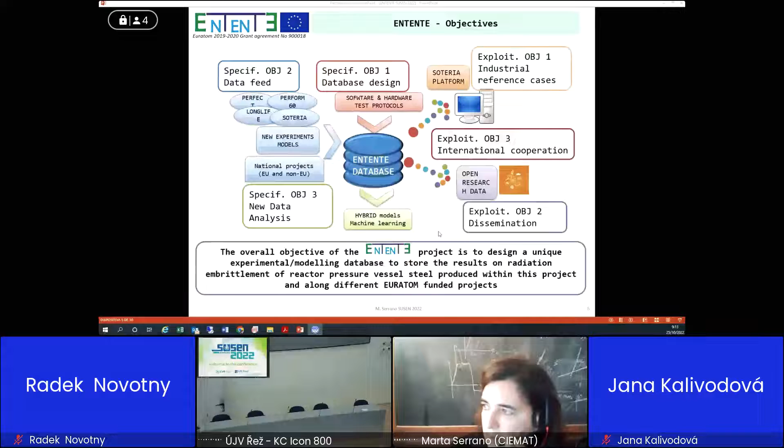The consortium is quite large - 27 partners from industry, research centers, and small and medium enterprises across 12 countries, including Ukraine and Japan. The grant is 4 million euros, as usual. You can see all the partners here, and the budget distribution is more or less similar for everybody, except 2 or 3 large partners, but overall it's fairly equally distributed.

Now I'll talk about the challenge in creating a database. When we started writing the proposal, we had to learn new concepts that, for us as scientists - I am a mechanical property scientist - are totally far away from our usual business. The key challenge is to define the database architecture. For that, we need to talk about ontologies of data. We need to decide if we want a relational database, or interfaces with other databases, and all this work is done not by material experts but by informatics experts in the consortium.

So we have a partner who is devoted to the design of the database with all these new concepts that are far away from the material business, but they are working on the database, and we will show you some examples. When you talk about data, data are important, but the most important are the metadata.

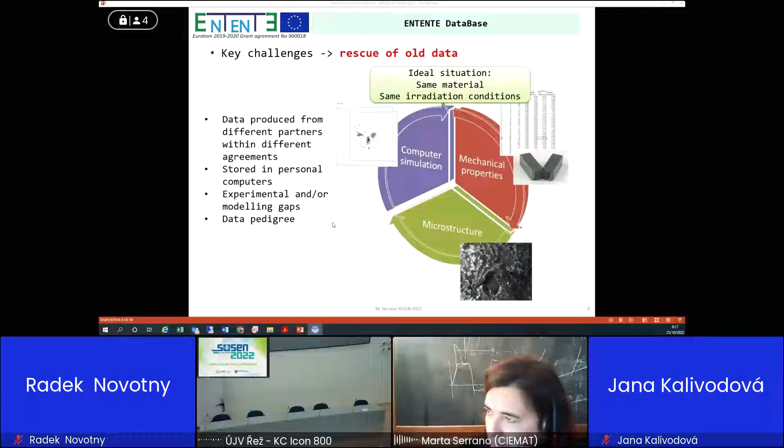Other key challenge on the definition of the database is the definition of the data formats. For mechanical properties, it's quite easy because they are determined following a standard, and in the standard the format of the report is more or less defined. When we are talking about microstructure and moreover on modeling, we have no data format defined. How do we store pictures, how do we store the results of a Monte Carlo model? So we need to define data formats for these activities.

We also want to have interoperability with other material databases, because other material databases exist. For example, the European Material Modeling Council has a database, the European Material Characterization Council, IAEA has a model database on Cascade, NEA, and so on. So we want to define the database with interoperability with other material databases.

In that issue, we have involved NEA people also in the consortium. They are totally informed about the database effort. So in principle, during these 10 years after the project finalization, we can reach an agreement with NEA to export the database from CIEMAT to the NEA, and there it will remain for a longer time.

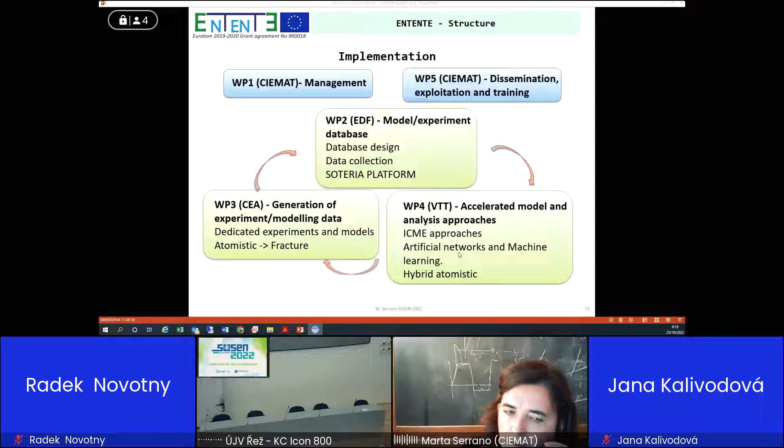I will go very quickly here. For work package 2, we are in the infancy of the definition of the database. We know that in 4 years it will be very difficult to have the full database defined. But at least we have done the first step on the data formats. We will set up data format committees. We follow the structure of existing databases such as RPV Steel, Plotter, and REAP. And we want to integrate the database with the Soteria platform.

For the data format, we have established data committees of experts that are defining the data format for different techniques.

The first one that has already a data format and structure is the Mechanical Property Committee, as expected, since we have the standardization of the mechanical properties. But I want to say that these two committees are working very well too, the Transmission Electron Microscopy and the SEM committee, collecting data and defining data format.

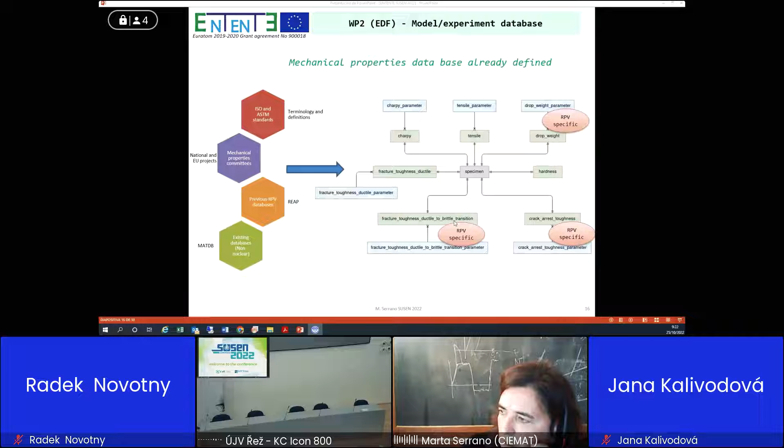I want to show you the mechanical properties database that is already defined. We use existing data, MATDB, REAP, national European projects, and ISO and ASTM terminology and definitions to define the mechanical properties database. Some of the mechanical properties are RPV specific, such as the drop weight, the T0 determination, and crack arrest toughness. So we use most of the data that already exists, but we include RPV specific mechanical properties.

About the Soteria platform, this is only to show you that the Soteria platform is a multi-scale modeling platform, and we want to improve the Soteria platform here with different models and so on.

I want to show you some of the new analysis techniques from data mining and artificial intelligence algorithms that we are using within Entente. First of all, VTT is defining the workflow for the use of microstructural data and also tensile test data, in order to integrate this knowledge into an integrated computational material engineering, the ICME approach. That is the one where you don't need to have all the information at all scales. You can go from one scale to another, for example, from atomistic model to microstructure by semi-empirical models. Not all has to be atomistic based or physical based.

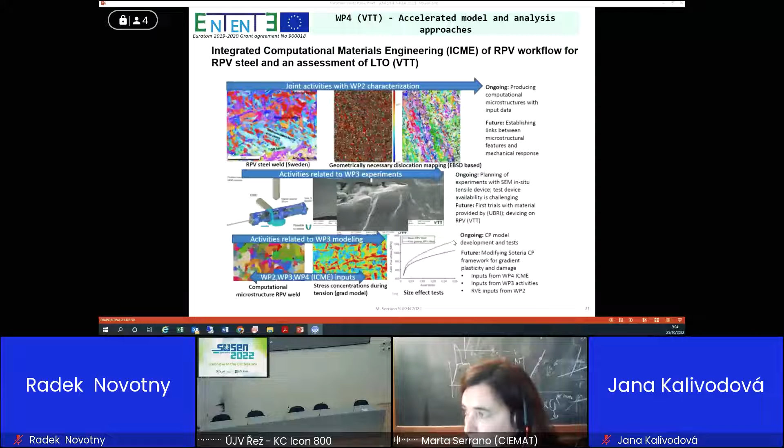I want to show you a very nice example of the exploitation of data with artificial intelligence algorithms. This is work performed by Nicolas Castin et al. They demonstrate that a hybrid model, combining a kinetic Monte Carlo model, which is a pure atomistic model, coupled with artificial intelligence algorithms, can predict with high accuracy the embrittlement of the reactor pressure vessel, only knowing the chemical composition of the material and the irradiation condition. This is already published, and we used 100 atom probe tomography measurements and more than 1,000 experimental data points. This is very, very innovative.

We also have another very good result using a new analysis technique. This is a publication from Diego Ferreño et al. We used the existing database of RPV embrittlement, the RPV capsule from the Plotter database. The Plotter database is the database that supports the ASTM standard on the evaluation of the surveillance program. This Plotter database includes more or less 2,000 data points of Charpy shifts.

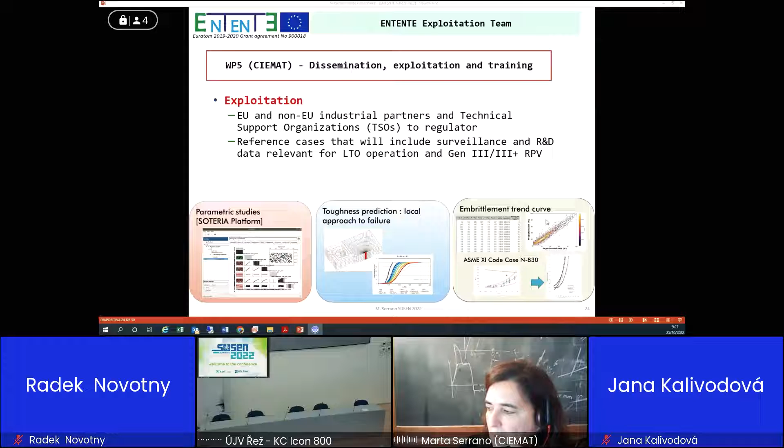If we go up in the scale, we also want to exploit the toughness prediction by local approach to fracture. And if we go to a high level of use, we want to exploit the ENTENTE database to improve the embrittlement trend curve and also to support ASME code cases. But also we have identified strong links with other Horizon 2020 Euratom projects that deal with RPV embrittlement. Of course, we have the STRUMAT project and the FRACTESUS project.

We can use STRUMAT data. STRUMAT deals with the variation of nickel, manganese, silicon on the transition temperature shift. We can use this part of the exploitation, I mean the SOTERIA platform, to analyze the microstructural evolution. FRACTESUS deals with the determination of fracture toughness of irradiated material, but it can also be supported by fracture models. And if we go up to an engineering level, the embrittlement trend curve, we have identified several international collaborations, but also FRACTESUS and STRUMAT, where they are producing fracture toughness data, can also be stored in the ENTENTE database.

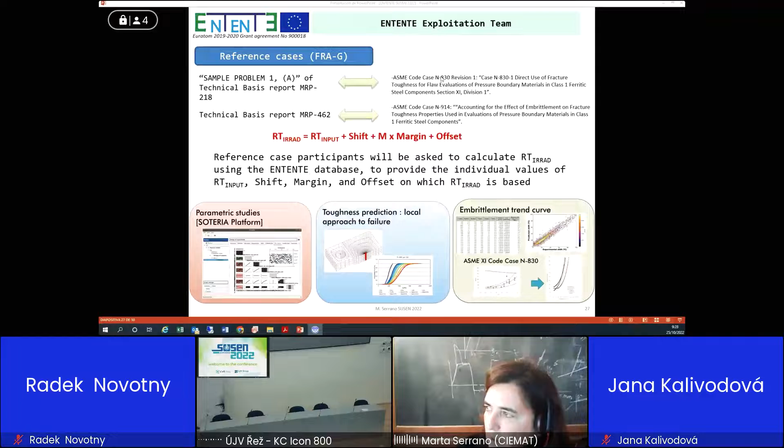We have already defined reference cases to exploit the data. The first one has been defined by Framatome Germany, and it is a sample problem to support the technical basis of the new ASME code case on the use of the master curve. I am not going to enter into detail, but the reference case participants will be asked to calculate the shift using the ENTENTE database to provide individual values of this input. And this will be used to support two ASME code cases on the use of the master curve.

We have defined another reference case. It has been defined by Mark Kirk. The problem here is NuScale, a small modular reactor. The problem of the NuScale vessel is that the material has higher manganese, higher nickel, and low irradiation temperature. You can see here in this plot the irradiation condition for NuScale. The temperature is extremely low, lower than existing RPV steels in operation, but also the nickel content and the manganese content are extremely high.

We are going to set up a reference case. It has been already set up with this chemical composition and this irradiation condition, and we try to use this hybrid model with kinetic Monte Carlo and artificial intelligence to estimate the transition temperature shift. And with this, I reach the end of the presentation.

ENTENTE started in September 2020. We are now reaching month 24. The specification of the ENTENTE database is available. The database will be populated along the project execution. Next year, we plan to start to populate the database with the data that has been collected. The first experimental results are available, and the first analyses with machine learning are available. And with this, I end the presentation.

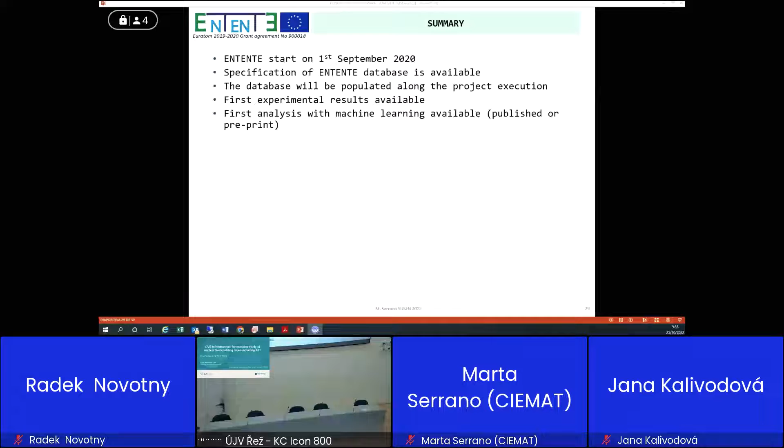I'm Petra Gavelová from Research Centre Řež, from the Material Analysis Department, and I will introduce our CVR infrastructure for complex study of nuclear fuel claddings, including accident-tolerant fuel claddings. I will introduce zirconium-based cladding topics at the beginning. Then I will tell you some of our CVR activities in nuclear fuel cladding, including ATFs. Then I will introduce the nuclear fuel inspection activities in CVR, led by my colleague Marcin Kopec. Then I will switch to the mechanical testing of neutron-irradiated cladding tubes in shielded hot cells, led by my colleague Alica Federikova.

And the last of my points will be the part of microstructural analysis, which is focused on electron microscopy studies, mostly on scanning and transmission electron microscopy, which is led by my colleague Patricia Holodová. So, what are the zirconium-based cladding tubes?

Let's say that this is ultra-pure zirconium with alloying elements of niobium, tin, iron, and chromium, and they have very good properties for cladding tube applications, mostly because of their neutron transparency and good corrosion resistance to withstand the extreme conditions of the primary reactor circuit. The zirconium-based claddings have a very high durability and strength. So the combination of these properties gives them importance as nuclear cladding tubes.

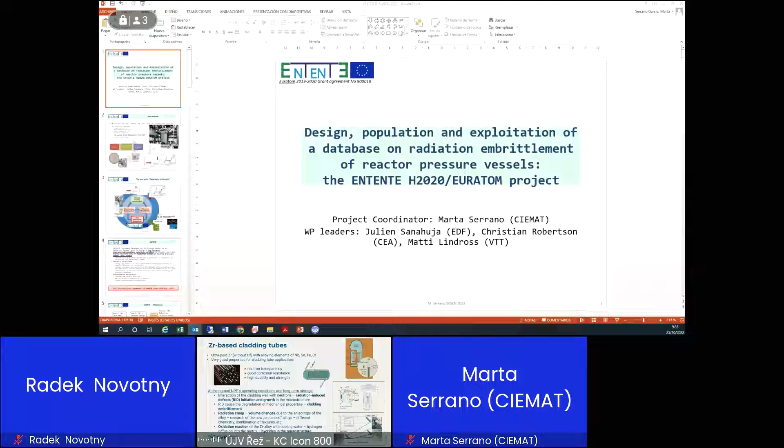What happens under normal nuclear power plant operating conditions and long-term storage? During the process, there is the interaction of the claddings with the neutrons. So radiation-induced defects are created in the microstructure, and they cause the degradation of mechanical properties. That means the material is hardened and embrittled. We can observe the radiation creep.

It means the volume changes due to the anisotropy of zirconium alloys. And we can observe as well the oxidation reactions of the zirconium with cooling water, and we can observe the hydrogen diffusion into the matrix by analysis of hydrides in the microstructures.

Briefly about the accident-tolerant cladding concept, whose study sped up after Fukushima in 2011. The ATF cladding concept means the improvement or replacement of currently used zirconium-based cladding. So we can speak about ATF cladding materials or ATF fuels. ATF cladding materials try to modify the current cladding materials, so by coated zirconium alloys or improved zirconium alloys.

And from advanced materials, we have some advanced steels, refractory metals and silicon carbide ceramics. From the perspective materials, we can mention the chromium-coated zirconium alloys, which are tested in nuclear power plants from 2019. As well, a very perspective material is so-called FeCrAl, so an iron, chromium, and aluminum-based metal, and widely tested are silicon carbide materials among the ATF cladding materials. From the ATF fuels, there is the way to improve uranium oxide material, to develop high density fuel and encapsulated fuel.

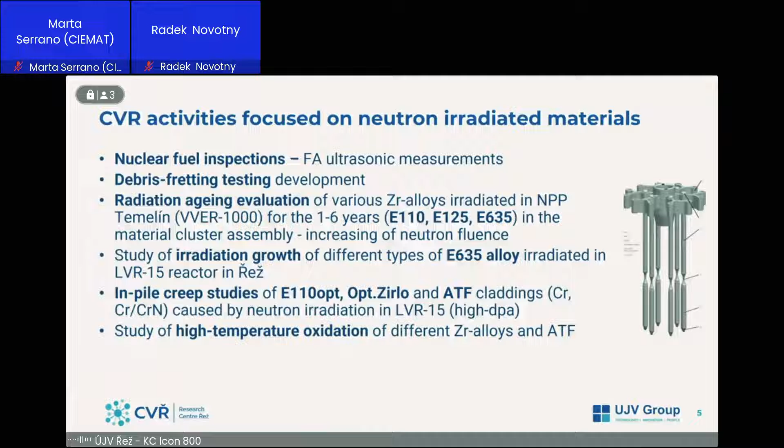And we study the in-pile creep of E110, Optimized ZIRLO, and as well ATF claddings, which are based on chromium and chromium nitride coating. These materials are as well irradiated in LVR-15. And a huge area of the study of zirconium alloys is high temperature oxidation of different zirconium alloys and ATFs, in cooperation with the UJP Institute in Prague.

So going to the nuclear fuel inspections, which support the Czech nuclear power plants, we provide NDT methods. CVR developed the ultrasonic system for fuel assembly geometric measurements. This system automatically detects the spacer grids on the fuel assembly and conducts the measurements in this area. Here is an example of the output of the ultrasonic system applied to real fuel, which is a single side measurement, and there the system automatically detects the spacer grids, which are marked by a DM.

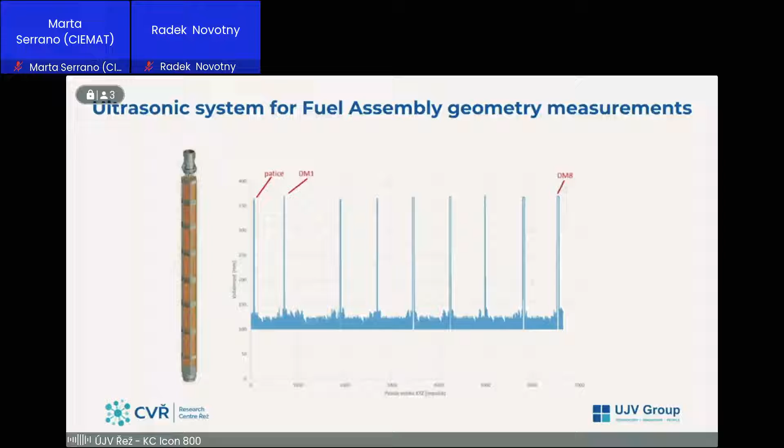CVR also developed automatic digital image processing for fuel inspection optimization, enhancing the speed and accuracy. It eliminates the human factor, and digital image processing helps also with on-cladding changes like oxides, hydrides or pitting, which we can notice on the fuel rods.

Going to the very perspective method of debris fretting testing, which is performed in our fuel group. Debris fretting testing we can perform in air conditions at room temperature, in wet conditions, in defined chemistry, as well as at elevated temperatures, and we can simulate in the autoclave real conditions: PWR, BWR, and VVER conditions.

So here are some results from the debris fretting testing where we compared two types of ATF claddings, and there is visible the fretting depth of different coatings, also supported by the microstructure, where we can compare the results on the surface damage.

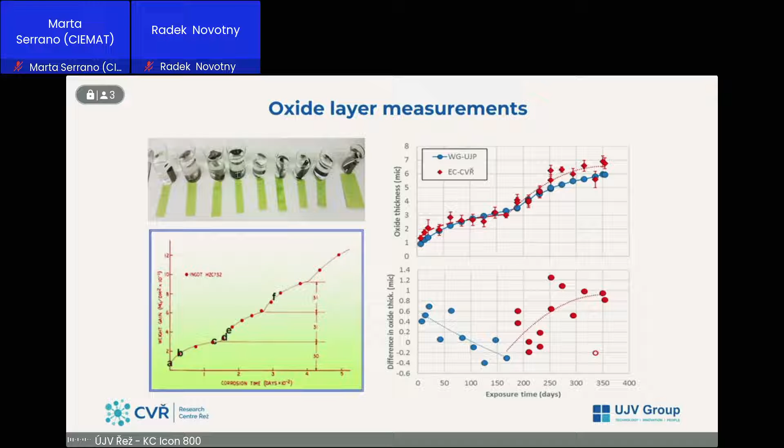Our fuel group also does oxide layer measurement by electric current. So the electric current oxide layer measurements in wet conditions we can see compared to the standard weight gain methods, and there is perfectly visible the type of the oxide increase with almost no water intake.

And as well we do neutron radiography. This is as well the NDT technique to have insight into the internals of the specimen. So mainly that was developed for hydrogen aggregation assessment with the precision on the level from 12 to 16 ppm.

Going to our second group in our department, which is the mechanical testing group of neutron irradiated cladding tubes in hot cells. So we do the standard mechanical testing as well. We develop new methodologies mainly for evaluation of ATF claddings. So we do tensile, compression, bending testing, high temperature creep, low or high cycle fatigue.

As well we do micro and nano indentation and adhesion testing of claddings and ATFs. And we have in hot cells the autoclave for stress corrosion cracking initiation in simulated PWR conditions. So here is the insight to the hot cells, and there are examples of specimens after tensile testing in axial and transverse direction, which we perform on cladding tubes.

So just briefly what we do, this is the project of testing of irradiated E110, which was irradiated from 1 to 6 years in Temelín. And then we do the mechanical testing like tensile and creep testing supported by electron microscopy to evaluate the radiation-induced damage. I will tell later.

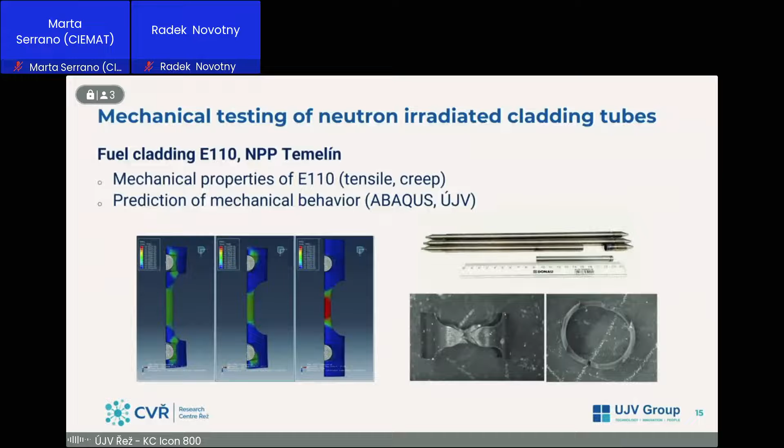And we cooperate within the UJV group, where we compare the experimental data with the simulations. So they predict the mechanical behavior, and we cooperate with our experimental data. Regarding the testing of ATF claddings, we developed within a few projects the new methodology. So we do on ATFs the low cycle fatigue.

We characterize the ATF coatings by nano hardness and SEM with wavelength dispersive spectroscopy. So we notice the chemical changes and local mechanical changes in the ATF coatings after neutron irradiation. And as well, we study some unfavorable effects in fuel claddings and their impact on fuel safety. So here are several new methods we developed under the TAČR project.

And going to the microstructural support, which is focused on electron microscopy studies, this is like the last part of evaluation. So we compare the reference and neutron irradiated microstructure and evaluate the radiation-induced defects and structural phases, and as well the radiation growth, and it correlates with the results from

the mechanical testing. We as well compare the non-deformed and deformed specimens so that we notice the areas of localized deformation, and these areas are the source of information. There we study the deformation mechanisms. We evaluate the general and local microstructure by electron microscopy methods. Here's the example of tensile testing in axial and transverse direction from the cladding tube.

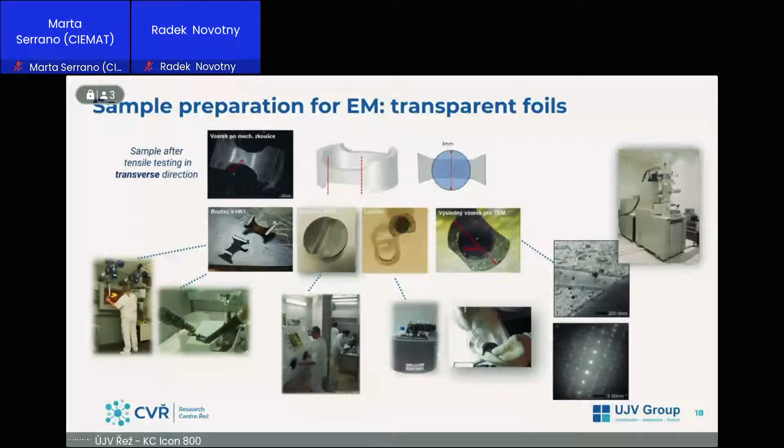So here's the workflow, how to prepare the specimen from the transverse direction after mechanical testing. So we choose the place and do the cutting, grinding and polishing to obtain the final thin foil to observe the radiation-induced damage in the transmission electron microscope. These irradiated materials are prepared in hot cells and glove boxes.

What we do by electron microscopy, we do image and diffraction analysis and chemical analysis, and then the results from transmission electron microscopy are completed by scanning electron microscopy, where we perform the crystallographic analysis and grain size, texture, and we observe the local misorientation after irradiation, and as well the chemical analysis we do in low magnification to complete the TEM results.

And here are some examples of reference materials, zirconium-based claddings. There are the Russian E110, E635, and E125 microstructures, and as well there are the Zircaloy, ZIRLO, and Optimized ZIRLO different microstructures.

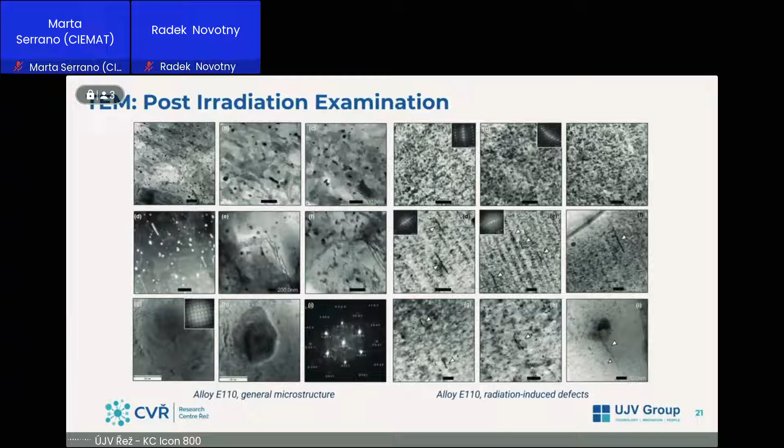Regarding post-irradiation examination, what we evaluate in neutron irradiated materials, we observe the radiation-induced precipitates and different dislocation loops of A and C types. We can observe the hydrides in the microstructure, and we observe the amorphization of previous secondary phase precipitates, which are visible after high neutron fluence. And as well, from the deformed specimens, we describe the deformation mechanisms, which is widely studied.

So here are some examples of A dislocation loops in microstructures which are formed at low fluences. This is the first image. The second image, there we can observe the C type dislocation loops which are formed as fluence rises. And then we can observe at high magnifications the irradiation-induced precipitates associated with these loops.

And as I told about the radiation growth of the fuel rods, these C type loops are responsible for radiation growth. So that's the way we evaluate after different neutron fluences compared to the mechanical properties and the radiation growth evaluation.

And these are the images of the place which is marked on the specimen. So this is the specimen taken from the deformed place directly, and we can observe the deformation bands within the grains in the prismatic planes of the hexagonal lattice of zirconium alloys.

So here we can study in detail, and there is the way that loops might get annihilated or dragged by dislocations, and they produce a clear zone free of these defects. So these free channels serve as a path for dislocation gliding. So this is the strain localization at the grain scale.

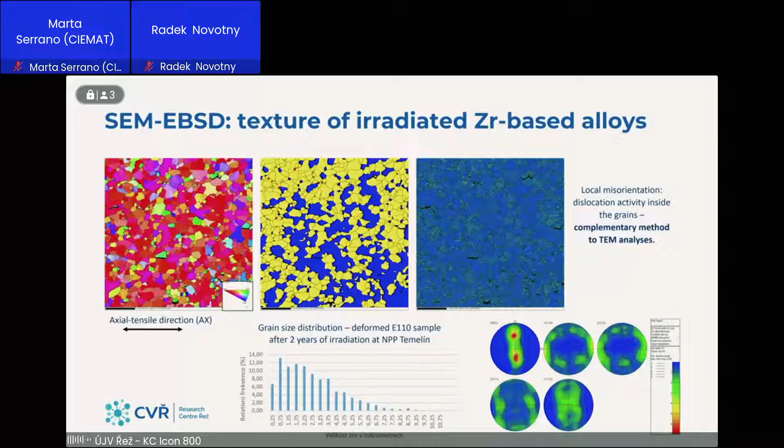So to give a brief summary of our research on zirconium claddings, we do non-destructive testing as well as destructive testing, and we evaluate the influence of neutron and gamma radiation, corrosion environment, heat treatment and deformation hardening, and we do the mechanical testing and we observe the change in mechanical properties.

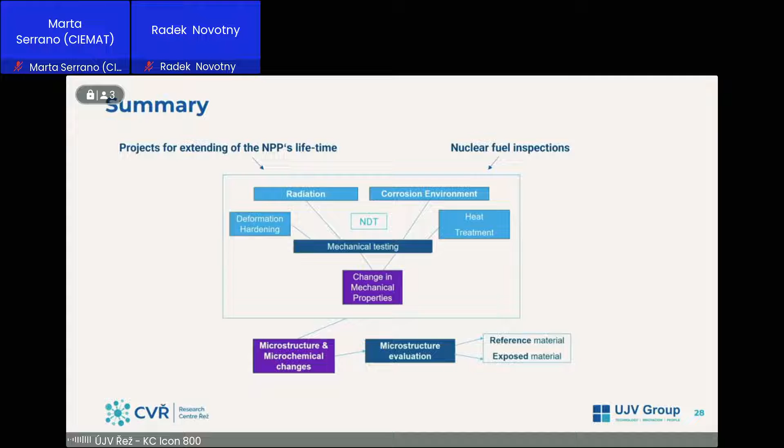Thank you very much, Petra, for your detailed presentation about the inspection of the fuel and testing of the cladding materials, which is actually the first barrier for the fuel going out of the reactor. So it's very important to have such developed methods, and I'm really very proud of your team and all the researchers here in CVR that they are able to perform such analysis and be a very good player in this area.

So, is there any question? Yeah. Thank you, Petra, for a very nice presentation. I have just a simple question. What's the lifetime of fuel cladding? How long can it be used?

There is the 40 years, and it should be like the lifetime of fuel claddings. Fuel claddings, yeah. I mean, how long can they be used? You said that you irradiate the samples from 1 up to 6 years. And I know that the campaign takes like 18 months usually. So I don't know how long it can be used.

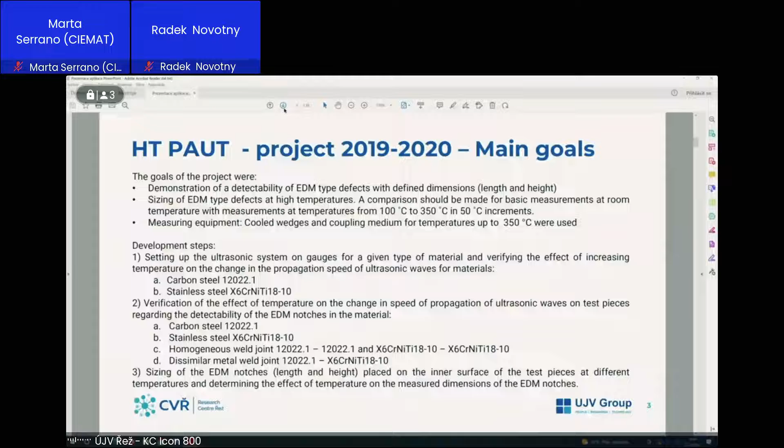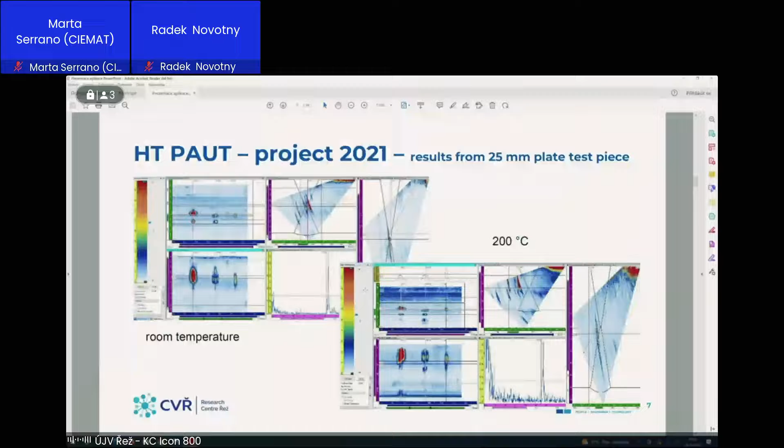Here are similar results which you could see: for temperatures up to 350, detectability and sizing was okay, and nowadays we have two qualified inspection procedures, and we are in the state of preparation, demonstration of measurement in situ. So it means in the technology of the secondary side of Temelín NPP.

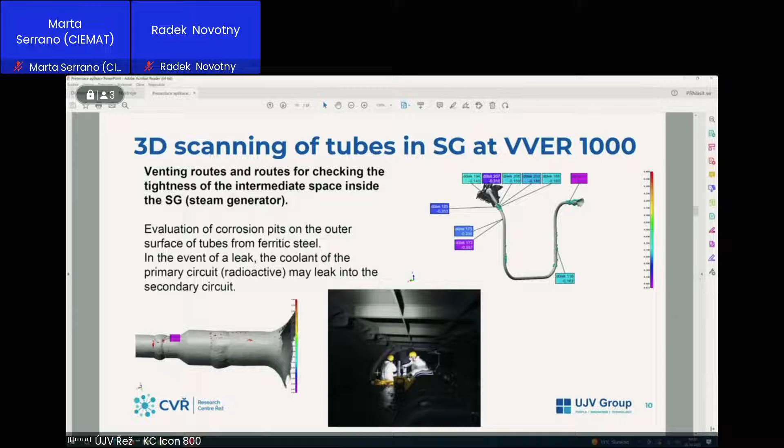This example is again from Temelín. We measure carbon tubes 16 times 4 millimeters inside steam generator. The reason is it can occur corrosion pits on these tubes, and in the event of a leak, coolant of the primary circuit may leak into the secondary circuit. That's why we are measuring again in this not friendly conditions, radiation, and in this case also temperature from 40 to 50 degrees centigrade.

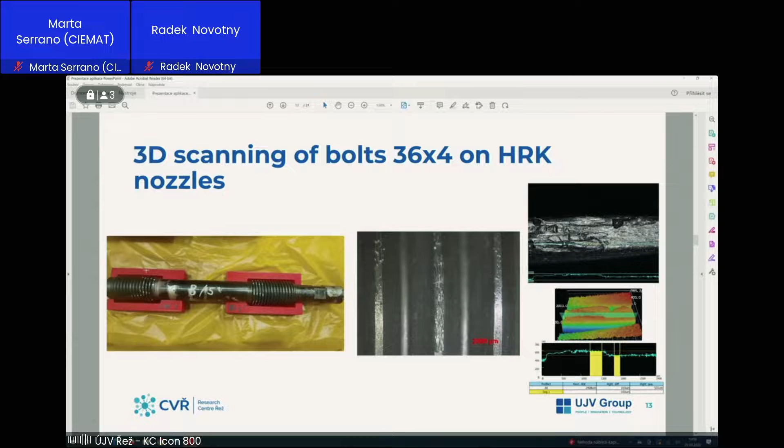Here is an example when we were using replicas for more than 30 years operation. Operator has to open these flanges, and we are asked to perform 3D scanning. We made the decision that the best way would be to take replicas and then scan these replicas. Here you can see our results. On the left photo you can see our special tool to take replicas. And now let me speak about manipulators.

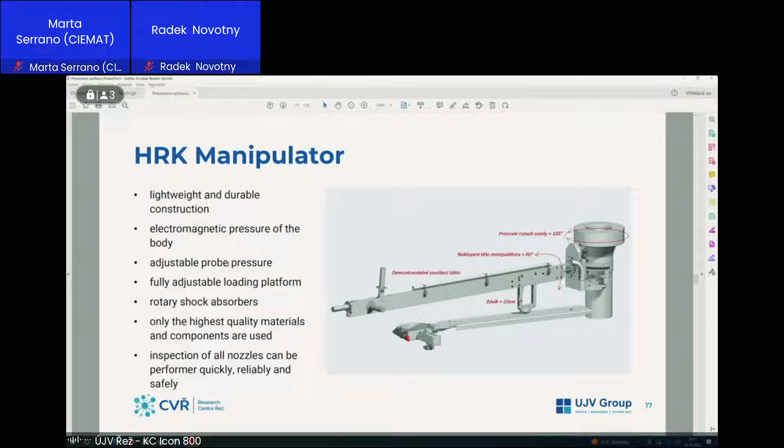Here is a manipulator for control rod nozzle weld joints of the reactor cover of the Dukovany NPP. Here you can see the main features of this manipulator. This manipulator is lightweight and has durable construction. There is electromagnetic pressure of the body, adjustable probe pressure, and so on. Nowadays, ČEZ will start inspections with usage of this manipulator.

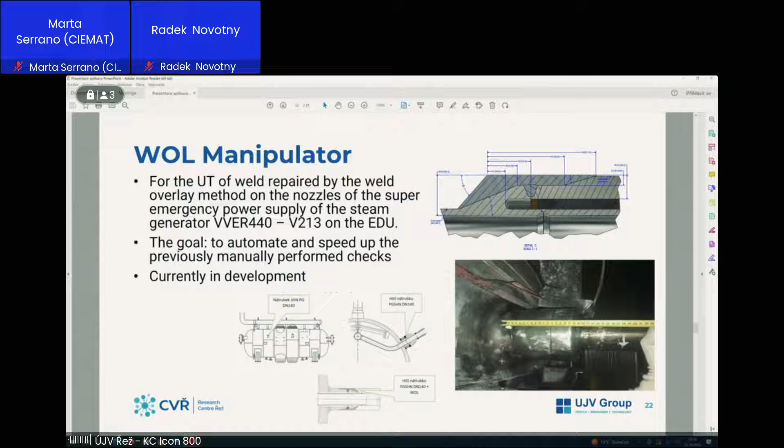Now let me speak about the weld overlay manipulator. I showed you that we scanned this nozzle before the weld overlay was applied. Weld overlay is applied, or will be applied, on all super emergency nozzles. During the operation, ČEZ has to perform inspections, and we were asked to develop a special manipulator. This manipulator you can see on this figure. There are dimensional limitations which we have to solve, and there is self-supporting fixing on the pipe. Here are another drawings of this manipulator.

In the last part of my presentation, I will speak about new methods. Let me start with the so-called NEWS method, non-linear elastic wave spectroscopy. There are two techniques, and in this case, for pipelines, we use non-linear wave modulation spectroscopy. The principle is that we send two frequencies using two sensors and one receiver, and we check if there are some frequencies and multiples of these F1 and F2 frequencies in the spectra. If there are many of these frequencies there, then we can say that there is some nonlinearity caused by a crack.

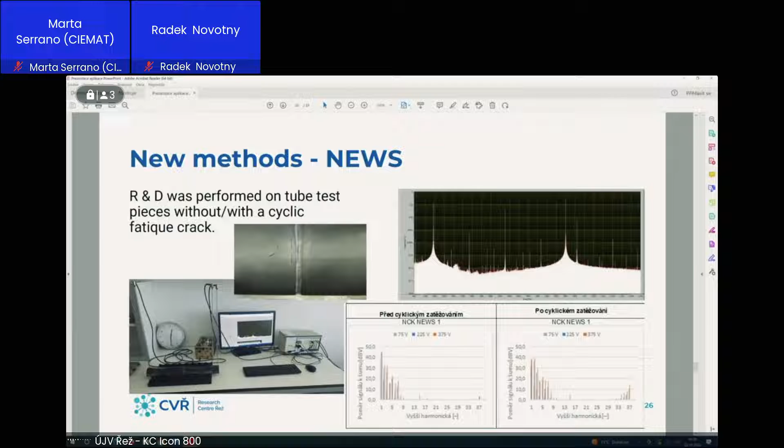And why are we doing it? At Temelin nuclear power plant, they have leak monitoring of the pipe system using more than 100 ultrasonic sensors. Our research and development was on the same sensors used in this system, two senders and one receiver. We also performed evaluation if sensors and pipelines can be used for this method, and last year and this year we approved that this system can be used on Unit 2, not at Unit 1. At Unit 1 they have different hardware, and the signal is 100 times lower value than on Unit 2.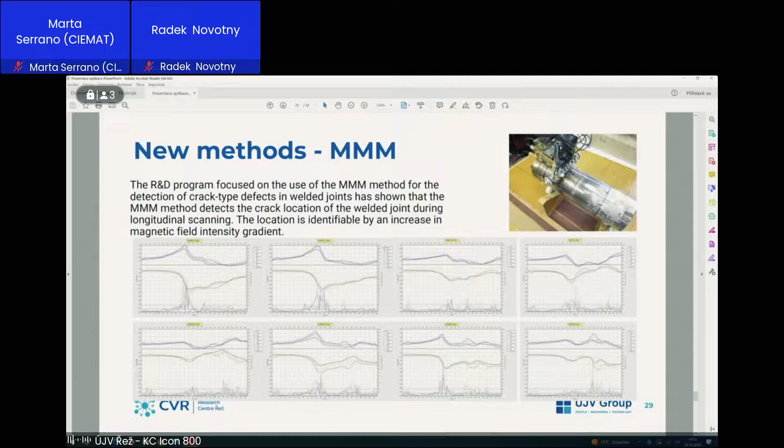Here I put an example from testing of a dissimilar metal weld with a crack in this area, found via this MMM method. We had, in this case, 8 traces, and on trace number 1 and 8 you can see there is a peak of gradient of intensity of the magnetic field, so this was in the area between trace 1 and 8. In this way, we evaluated that this method can be used for detection of cracks.

New usage of magnetic memory of material was tested on a flange. We proved that with this method we can detect loose bolts, either with pressure inside or no pressure inside this flange, and also we proved that we can detect over-tightened flange joint bolts. In this figure there was a loose bolt number 8, and you can see changes on the closed bolts number 7 and 9. So that's the technique for how loose bolts can be detected.

So that's all, and thank you for your attention.

For the presentation, the last in this block of methods of testing, very interesting. Okay, thank you for your presentation. In this area of testing of the materials, the first part of our conference.

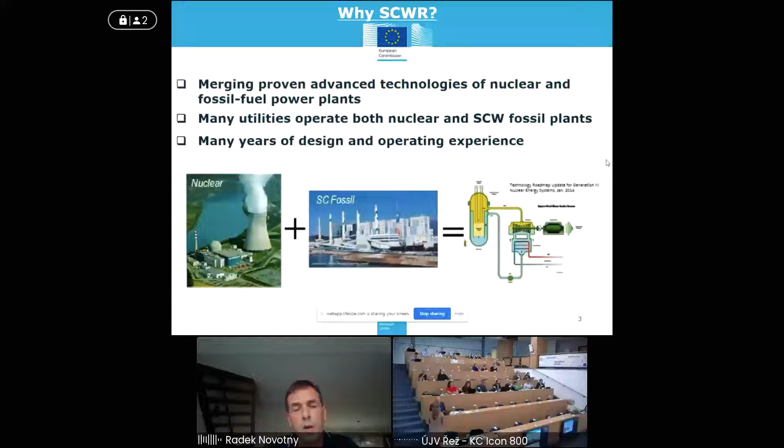So I will start with the question, why SCWR? Because it makes sense to me and many people, in the past and currently, because it's actually a merging of two proven advanced technologies of nuclear and fossil fuel power plants. Of course, many utilities in fact operate both nuclear and supercritical fossil plants. And there are more than 430 operable nuclear reactors around the world and more than 400 supercritical boilers around the world. So we have many years of design and operating experience.

If you look a little bit into the past, then it all started in the 50s and 60s. The first concepts were prepared and developed, but none of them was ever built. But what has been built in the 1960s were experimental nuclear power plants with superheated steam. So we don't have any experience from the past with supercritical water-cooled reactors, but we have some experience with superheated steam cooled reactors.

If you look at the renewed interest in the 1990s, the main driving force was the combat to climate change, and of course reduction of greenhouse gas emissions. And again, at the same time, there was big development in developing countries, so it kind of raised demand for stable energy supply.

Concepts which were under preparation showed quite high potential for cost reduction. First of all, because fuel cost was lower, and second, because of the simplification of the whole plant and using the direct cycle. Then, of course, we could use advanced boiler technology, in particular with the development of ultra supercritical boilers and related material research.

And then, combining all these factors, when in the 90s the Generation 4 International Forum was set up, signatories agreed to pursue 6 concepts. The supercritical water-cooled reactor was one of them, and 5 countries decided to pursue this concept and work together on its development. The concepts were either pressure tube type or pressure vessel type, evolving from the current fleet of nuclear reactors, either PWR, BWR, or CANDU. Because of the similarities of both concepts, it was a big opportunity to collaborate.

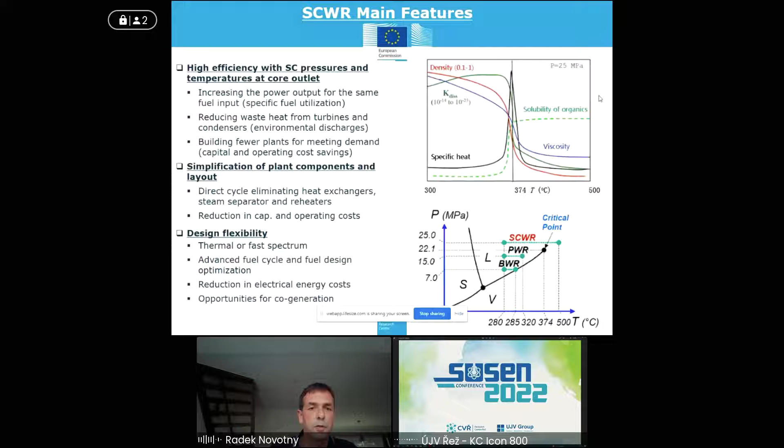If you look at the available concepts, I will mention 3 of them. All 3 were developed within GIF and national programs. The pressure tube concept was developed by Canada. The European concept HPLWR is a thermal neutron core developed within the HPLWR phase 2 project, and we also have the Japanese example of the fast spectrum SCWR core.

If we summarize work on these concepts, Canada, EU, and Japan have completed the development of their concepts. International experts reviewed the concepts and assessed their viability, and China already completed their concept as well, but international experts didn't review it yet because of the COVID-19 situation in China. The Russian Federation is still working on their concept.

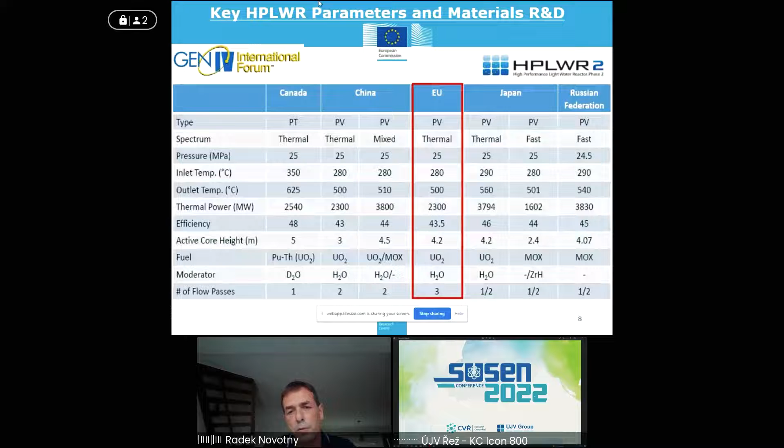If you look at the European HPLWR supercritical water-cooled reactor, we can see its parameters in this table. It's a pressure vessel type, thermal neutron spectrum, 25 megapascal water pressure. Water is entering the core at 280 degrees C as subcritical and leaving the core at 500 degrees C as supercritical. It's a 2,300 megawatt thermal power reactor with foreseen efficiency of 43.5%, using uranium fuel, and water works both as moderator and coolant. Water passes 3 times before it leaves the core at 500 degrees C as supercritical water.

I will also mention material R&D within HPLWR phase 2, because it was a little bit of a failure. We didn't succeed in identifying the material for the fuel cladding. None of the materials passed all the criteria we determined before the project as criteria of success. The main problem was the peak cladding temperature due to deteriorated heat transfer, which was much higher than 620 degrees C, and we didn't find a material with enough strength or mechanical properties at this temperature and with the geometries used for the HPLWR concept.

I should also mention the supercritical loop, which was designed and built by UJV. I'm mentioning it because it's probably the most advanced testing facility we have at the moment in the community. First of all, it's the only device we could use in cores for radiation studies, and second, it's actually the closest we could get to the real flow rates in a real plant, because it uses very high flow rates, up to 200 kilograms per hour of water.

Flow rate is possible with this device. So far, the device has never been used in the core, but it was used in out-of-pile tests, and it's still the most powerful facility we have in our possession.

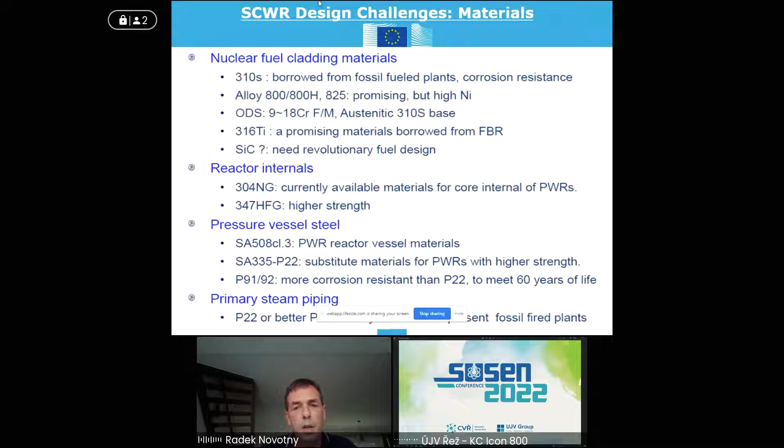Alloy 800H. And of course, for reactor internals, for pressure vessel steel and primary steam piping, we could use the experience from current nuclear reactors and supercritical boilers, which made our life much easier. We can use the materials which are used in light water reactors. And for the primary steam piping, P91, which is very well known from supercritical boilers.

Even if you look at corrosion, which seems to be a pretty much solved issue, in reality it's not. It's more or less the knowledge we have gathered in the past 20, 30 years. And from that, we a little bit optimistically said that we have some corrosion resistant materials, but we didn't evaluate all the materials, which I will comment on later.

In reality, we don't have any alloy at the moment which would fulfill all these criteria, and we have real gaps, like in stress corrosion cracking testing, irradiation assisted stress corrosion cracking, and so on. I will comment later on this.

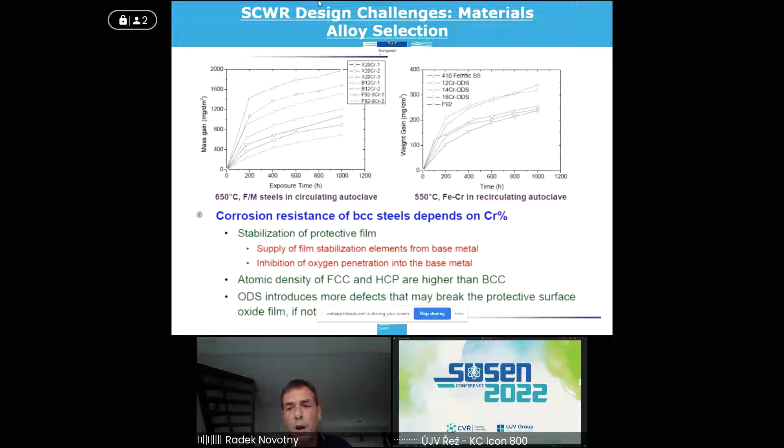If you look at the results in the upper part, most of the tests we have been doing are corrosion tests. That means we are exposing specimens in the autoclave. We weigh them before and after the exposure, and then we calculate the weight gain due to oxidation. A very simple test, but when we compare results from different labs, we realize how big the differences are and how much we must work on improving the interrelation of these labs.

Anyway, austenitic stainless steel is much better. There are more steels which show very good corrosion resistance even in high temperature supercritical water. I would show one example, which is HR3C, the Chinese equivalent of 310 stainless steel, which shows a very low corrosion rate because of the high chromium content. Again, the research also focuses on ODS because of their potential for good mechanical properties, but at the moment it doesn't show a very big benefit in terms of corrosion rate.

If you look at the oxide layer, very homogeneous uniform oxide layer, even at high temperature supercritical water. And on top of it, these alloys also showed acceptable mechanical properties up to 650 degrees C supercritical water. But here, as I mentioned, we definitely have a gap, because first of all, most of the exposures are short. So it's in the range of 1,000, maximum 2,000 hours. We need longer exposures to extrapolate results to 20,000 hours of in-service life.

Second of all, we have to concentrate also on mechanical properties, and in particular nickel content, because 310S stainless steel and 800H are perspective materials, but they have quite high nickel, and a high concentration of nickel is not very beneficial for reactor physics, for neutronics, and also for radiation protection in the future plan.

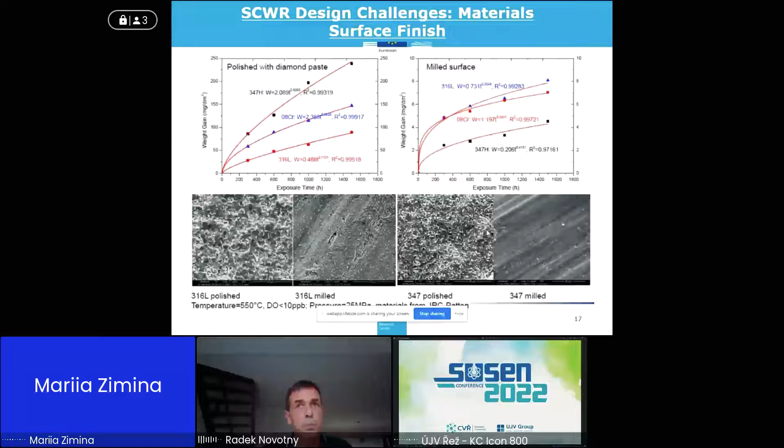We usually use these kinds of simplified methods like milling or grinding compared to polishing. But we need to focus more on methods which are well defined. We should use the experience, for example, of the MEACTOS project, where more very well defined methods for surface finish were used. And we should test these methods, and we should find the optimal method for surface finish of the future cladding, not only cladding material.

But we are doing it for two reasons. We need to optimize the pressure for the future SCWR concept, for example, a small modular reactor concept or the HPLWR concept. And maybe 25 megapascals is not the best pressure we chose. Maybe we can go even a little bit lower in pressure, and we would reach some other more beneficial effect on corrosion resistance.

Another reason why we should consider the pressure is that we have many results from different tests in superheated steam, which I already mentioned. And there are attempts to actually use this kind of superheated steam as a surrogate. This is a big thing, because if we want to simulate effects like flow rate, or heat transfer, this kind of thing, we need pretty robust facilities.

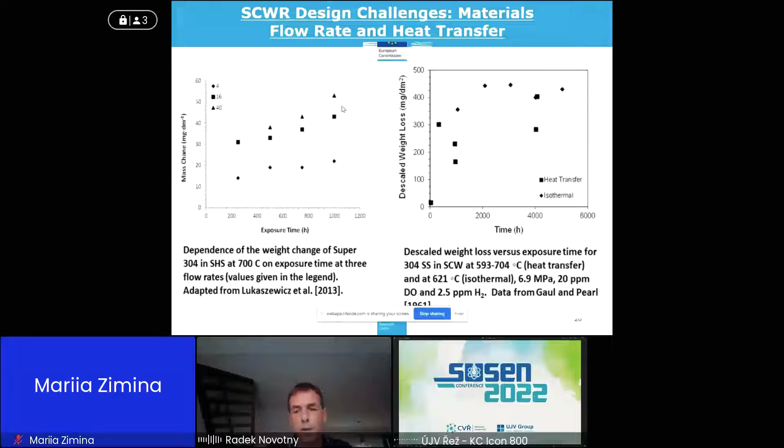Another challenge or big gap is stress corrosion cracking testing. Because so far, most of the stress corrosion cracking experiments in supercritical water were limited to SSRT or constant extension rate tests. These tests are very useful, that's for sure, because it helps us to select materials quite fast. It helps us also to quantify certain change of conditions, but we are not getting any quantitative information, only very limited one. And that's why we need to go to more sophisticated crack growth rate, fracture mechanics based test, or SCC initiation test.

definitely in these. So the discussion is to what extent, because we are using data from mechanical tests at temperatures, usually in air or in inert environment, but how relevant these data are when the components are actually exposed to real environmental condition of supercritical water. This needs to be answered, and even in this area, we can have a look, and we need to compare to data, to mechanical test in air, and do the same test in the environment.

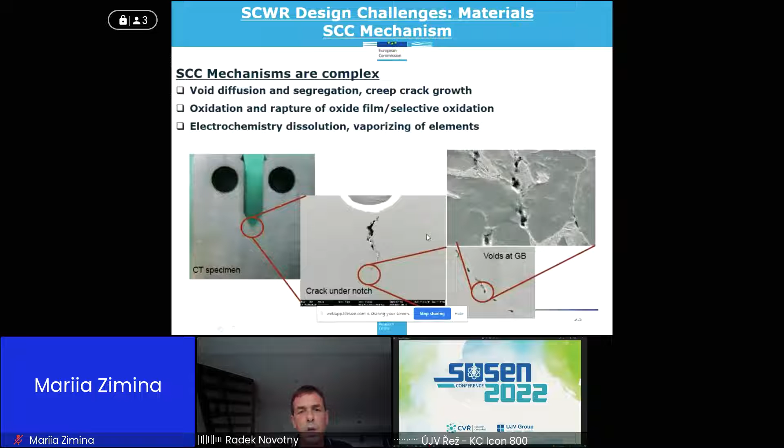If we look at what we are getting from this type of test, like the crack growth rate, it will help us to define what is the stress effect on SCC. What is the maximum stress intensity factor for crack arrest? And then of course we can create so-called disposition lines. That means the dependency of crack growth rate based on stress and on all various conditions in the core, even related to chemistry or materials.

And of course we need to focus on crack initiation test, because initiation is big part of the whole process. The propagation only smaller part. So we need to have a look at that, from the precursor up to the growth of short cracks. There are only a few examples so far on fracture mechanics based crack growth rate test. On the right side is one of the oldest studies where they expose 1/2 CT specimen constantly loaded.

In order to understand the whole thing, this crack growth rate is performed in several steps. At the beginning, we are pre-fatiguing crack using high amplitude, high frequency, and then we are slowly decreasing of load, and then we are slowly decreasing frequency and amplitude up to switch to constant load or constant stress situation. And there we start measuring 1,000, 2,000 hours real crack growth due to stress corrosion cracking. We are using online monitoring system to get the crack growth. We are using direct current potential drop technique, and we are measuring crack growth in situ depending on load.

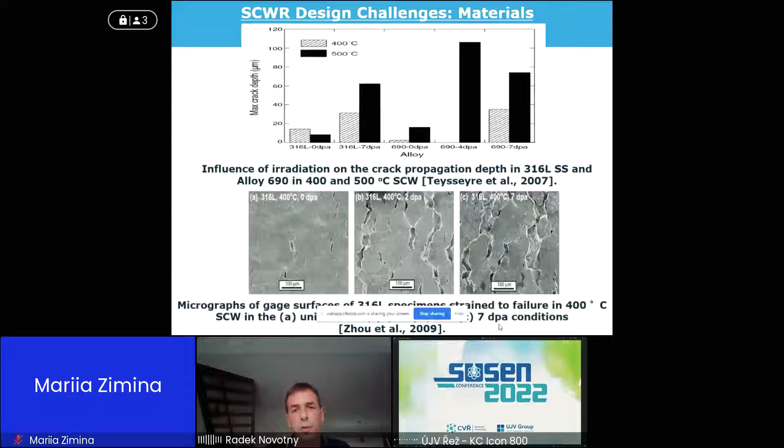But here it's a huge gap. We haven't performed enough studies. I could mention the ECC SMART project, where we will evaluate irradiation effect at least from the corrosion point of view. But we need to perform the same study also for irradiation assisted stress corrosion cracking evaluation.

If I look at the design challenges, and this is the last one, that's water chemistry. I already mentioned that there are big changes in chemical properties due to crossing the critical point. Of course, we have a big problem with water radiolysis because we expect that it could be markedly different from the experience we have from light water reactors. So we need to perform dedicated tests, we need to do a lot of modeling, and we need to understand if we can extrapolate behavior from light water reactors.

Based on the results of radiolysis, we will see how strong an effect it will have on corrosion and stress corrosion cracking. And of course, it can be reflected in follow-up testing if we see some big changes, for example, in concentration of oxygen. And we need to establish a water chemistry control strategy. In this case, we can use the experience from current light water reactors or supercritical boilers, and it should help us simplify the whole process. Here the experience is really huge.

Okay, and now this is my last slide, about future plans, but it's not really future plans. It's a little bit past, present, and future, because ECC SMART, as a natural development of the supercritical water-cooled reactor towards small modular reactor technology, started in 2019. So this is the past, and at the moment we are in the middle of the experimental program, many tests are running, and the project will finish in 2024.

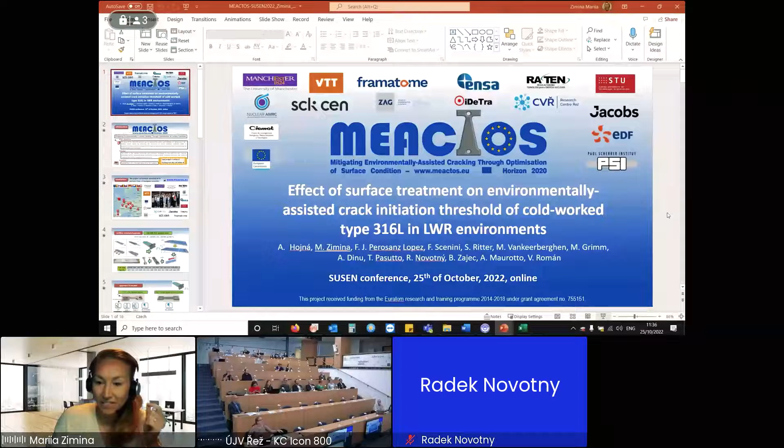So Maria, I see you are online - welcome and hello, please go ahead and present. Hello, I hope you are having a good time there. Can you hear me and can you see my screen? Yes. Okay, this one, right? Can you confirm? Perfect, yep, it's in presentation mode, thank you. So you can start.

Thank you very much, it's a pleasure to be with you, at least online, today. I would love to present the effect of surface treatment on environmental assisted crack initiation threshold of cold worked type 316L stainless steel in light water reactor environments. It is part of the collaborative project called MEACTOS, and I'll describe this a bit later. As you can see, there were many participating parties in this project, which is now finished. MEACTOS stands for Mitigating Environmental Assisted Cracking through Optimization of Surface Conditions. The main objective was to improve the safety and reliability of Gen 2 and 3 nuclear power plants by improving the resistance of critical locations in the reactors, such as welds, which are susceptible to environmental assisted cracking.

We aim to improve this through the application of optimized surface machining and improved surface conditions. The concept we chose as a consortium was to quantify the susceptibility to stress corrosion cracking using accelerated testing methods such as constant extension rate tensile tests and constant load testing with tapered specimens. This project started in 2017 and finished in February 2022. There were 16 partners from 12 European countries, including the UK, which is not officially part of Europe anymore. It was a very nice collaborative effort from all of us.

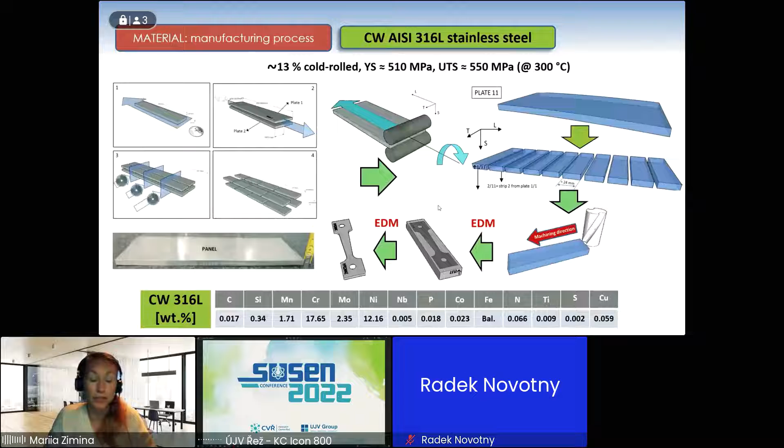This project consisted of two main parts: the first devoted to nickel-based alloys, and the second to stainless steel, particularly 316L cold worked stainless steel. Today I will focus on this material. It was specifically manufactured to fulfill our goals - cold rolled stainless steel with 13% cold work. The first step was cold rolling, then the panel was cut into strips, which were further machined using different techniques that I will discuss later. After machining, the specimens for stress corrosion cracking testing were manufactured using EDM, and then we had all the samples distributed to the partners for testing.

So we used two types of specimens. One is FTT, which is a flat tapered specimen, which has a tapered gauge section that allows us to have more levels of stress during the test.

These specimens were machined in different ways, so we have 4 different surface treatments. First one is RS, a reference surface, which was just ground using silicon carbide paper. The other 3 were actual machining. STI stands for standard industrial machining, chosen to compare results to actual industrial conditions. The second one was SAM, which stands for Surface Advanced Machining 1 and 2. The difference between 1 and 2 is that the first one was face milled with supercritical CO2 cooling, and the second one was the same but using lubrication.

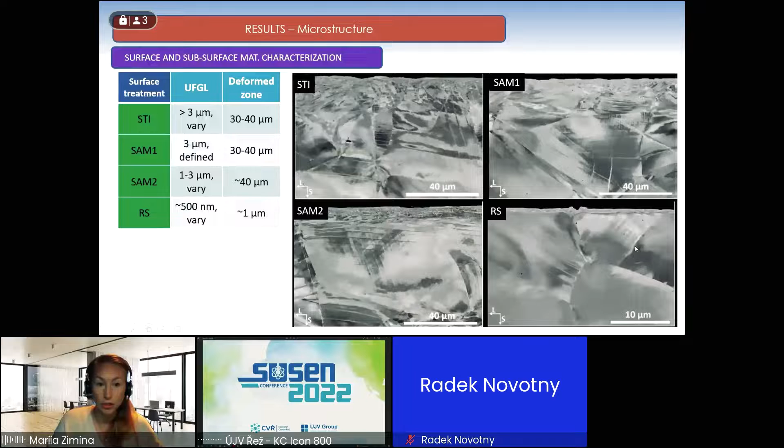The thickness of this layer varies with different applied stress or deformation. We calculated the thicknesses of these layers, and you can see that for STI, for example, it's more than 3 microns, which corresponds to the surface advanced machining 1, but it is a bit thinner in SAM2. When you just perform grinding on the surface, you end up with just a small ultrafine grain layer, about half a micron in thickness, and the material is almost not deformed underneath. We still need to remember that this material is 13% cold worked, so this amount of deformation is induced during processing or manufacturing.

We also measured the residual stresses of all four materials, and we found that there are tensile residual stresses in all the machined specimens, but not in the ground one, where, as I said, the structure is a bit different.

After the first task, the screening using accelerated testing, we observed intergranular or mixed cracking in all cases, in both environments, and for all four surface treatments. In task 2, initiation testing, we observed the same situation with a bit different structure of the cracks, but still intergranular or mixed. As Radek mentioned today, we can't really talk about the mechanism of this cracking using accelerated testing without performing crack growth tests.

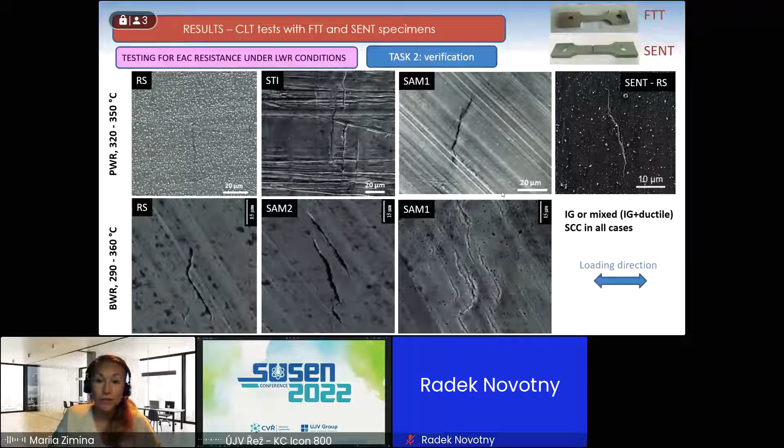All values were found to be close to the slow strain rate yield strength level, and the crack concentration, which was calculated using SEM, also followed this rule: the highest crack concentration was observed in SAM1, less in SAM2, less in STI, and then reference surface, which suspiciously follows the size of the ultrafine grain layer. We think that in BWR environment, where oxidation is more intense than in, for example, PWR water, it can be explained by the oxidizing conditions.

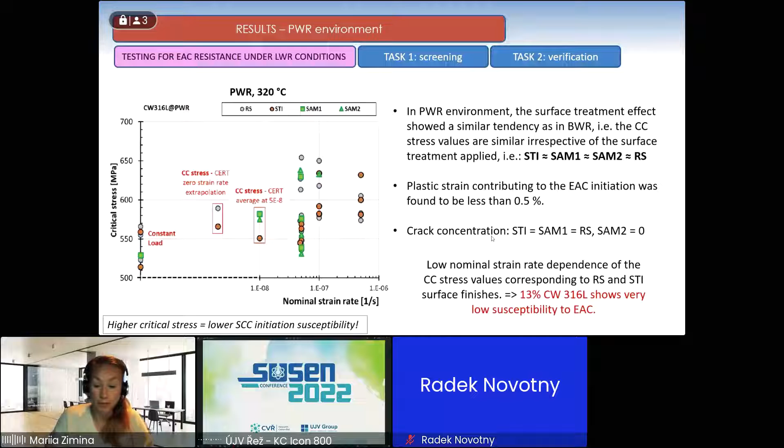For the constant load tests using flat tapered tensile specimens and notched specimens, we detected only a few cracks after the initial test period of 1,000 hours, and as I mentioned, not on every specimen. So some tests were performed for longer time, up to 2,100 hours, and the average critical stress from these constant load tests was always lower than the critical stress from CERT testing.

And the reason why is it so? It's because CERT testing is an accelerated testing, and it introduces high plastic strain into the EAC initiation process. That's why those values differ. Critical stress determined from constant load tests with tapered specimens was not dependent on time to crack initiation. The time to initiation was significantly reduced when the notch effect was inserted, which is quite interesting. And EAC initiation was slower in the oxidizing BWR environment compared to the reducing environment.

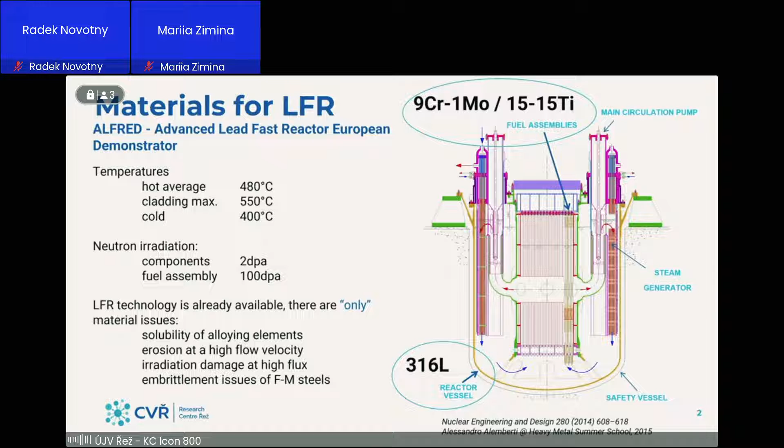These reactors are very compact. They have high power density. They are low pressure designs. Military loves them because they produce plutonium and have very high burn-up. So these are very perfect, and we don't use them because of materials problems. This is an overview of those materials. It's stainless steel 316L, low carbon and nitrogen controlled to avoid the aging effects. It's dedicated for the main vessel and some inner components.

15-15 titanium was developed for sodium cooled reactors as a cladding material that has some problems with swelling. And Grade 91 is 9% chromium, 1% molybdenum steel that is supposed to be perfect cladding, but it has some corrosion issues, and it has the best resistance to swelling. It resists very high dpa.

So the problem with these coolants is, let's say, mass transfer corrosion. It's a bit different corrosion. It's inherent to all non-isothermal systems. It's based on solubility of steel elements in the circulating metal, and you will dissolve some of your reactor in the core and transfer it to the cold leg. And that's the main problem of this system.

You can see here one example of, let's say, low carbon steel at very high temperature. It takes 400 hours to plug with iron, but if you put there some stainless steel containing nickel, then you can plug it very fast.

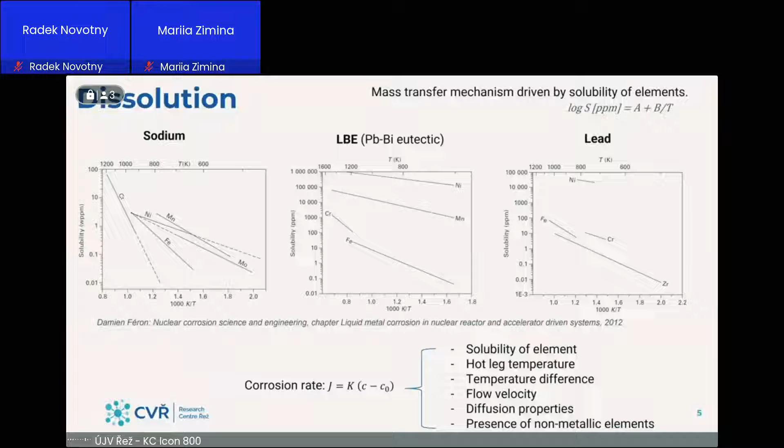So the corrosion rate depends on the solubility of the element, the difference between hot leg and cold leg, and flow velocity, and also very important is the presence of non-metallic elements that can speed up or slow down the corrosion process. So what we can do with this corrosion, the simplest idea is to grow a diffusion barrier, that is oxide, and slow down this dissolution process.

It was demonstrated by Russians on their submarines that if you put a small amount of oxygen, 10 to minus 8% of oxygen, you will develop this iron chromium based spinel that significantly slows down the corrosion process. So there are several mitigation strategies for this corrosion. One of them, and it's available now, is this oxidation, or growing this oxide layer, that has some advantages.

That is simple, but the problem is that it's a kind of balance between oxidation and dissolution, and it works up to a certain temperature, let's say 400, 500 maximum. Then some short-term solution can be applying a coating on the internal reactor surfaces, but as with all coatings, there is a problem with what you will do with a defect in the coating. So when there is a defect, you then have to rely on your oxygen control strategy, and that may develop some localized issues that are not critical for a reactor vessel, but may be a problem for cladding because it's a very thin tube.

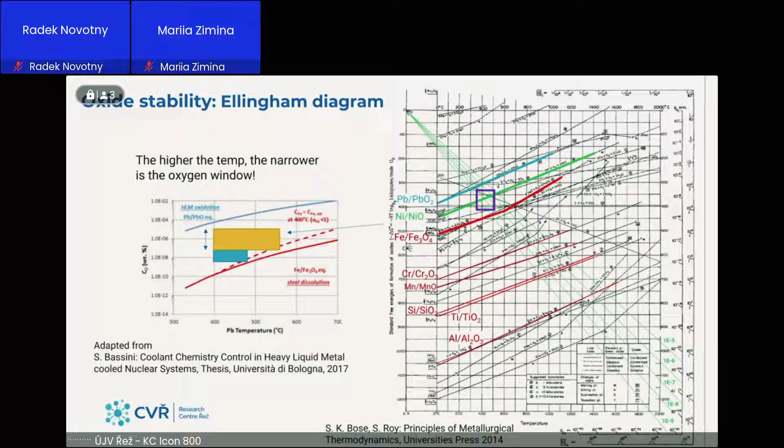Another fact is visible on this chart: there is a problem if you increase the efficiency by increasing the outlet temperature. You are closing this window that's now pretty narrow. That means that it puts some stress on your oxygen control system. So that was a brief introduction into the chemistry of liquid metal cooled reactors.

3 years ago, we were preparing a long-term experiment and built an austenitic loop for that. And I was expecting that we would have some kind of dissolution contest between our loop and the specimens. You can see here that in literature at relatively high temperature, 500 degrees C, even with oxygen dosing, they experienced very large dissolution attack. It was LBE after 2000 hours, and there is damage about 1 millimeter big. So that was our expectation.

Our goal was to test some reference materials from the RCC-MRx code that were chosen for the ALFRED reactor for thick-walled components. It was 316L and 316L low nitrogen, submerged arc welds and TIG welds, and also 15-15 titanium, 20% cold worked, that was experimentally made, and we also tested grade 91.

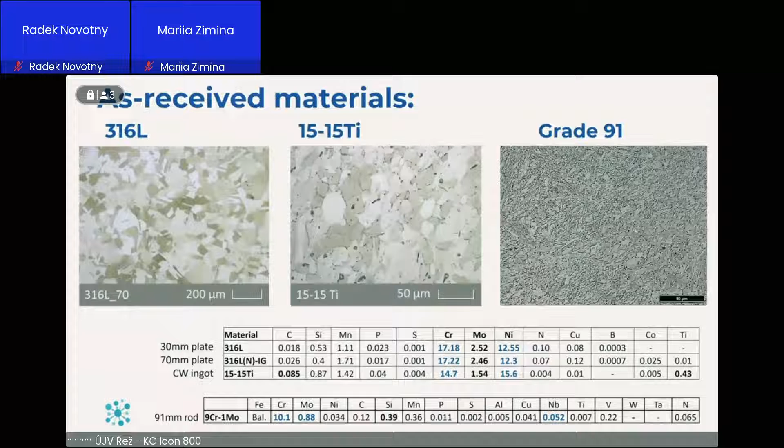Our specimens were cut from the plates by electric discharge, and the surface was finished by machining, which creates a very fine modified layer on the surface that became pretty important in our corrosion results. It was about 3 microns thick. You can also see some damage by machining. It's about 100 micrometers deep. So these are our specimens.

We placed them into a corrosion loop that is non-isothermal. It has a hot leg, and a cold leg with a cooled filter. In the hot leg, there is a mass exchanger to allow us to control oxygen content. There are 2 parallel corrosion sections where specimens were placed in the manner shown in this picture. And there are 4 oxygen sensors: one at the inlet and outlet of the mass exchanger, one in the hot leg tube, and one in the cold leg tube. So there is a record of this 20,000 hour-long experiment.

Most important is the record of the oxygen sensors. There are 4 of them, and you can see that every 1,000 hours there was some peak of oxygen that was indicating our replacement of the specimens. In one leg, there were long-term specimens for 8,000 and 16,000 hours, and in another leg, there were short-term exposed specimens that were frequently replaced. So you can see it's a bit complex matrix.

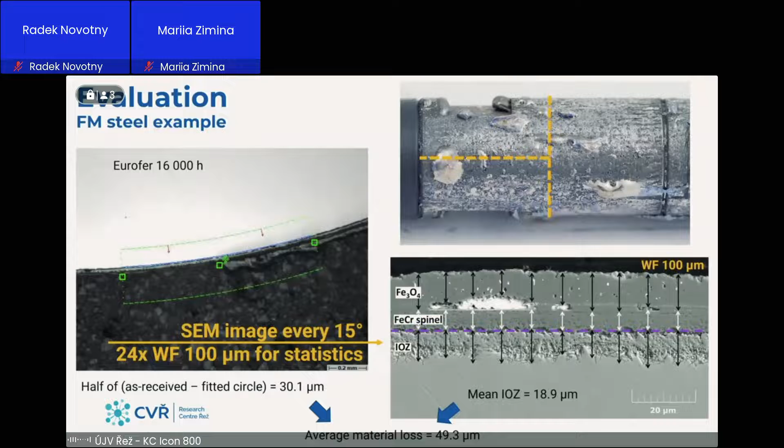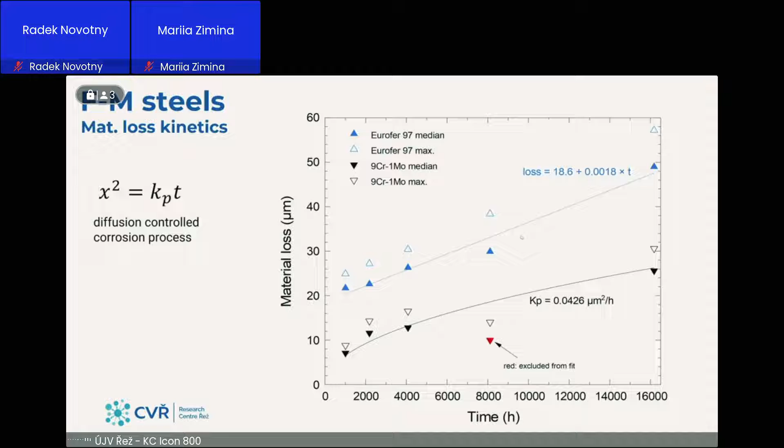The exceptional specimen was the 8,000-hour one because it doesn't develop the outer magnetite oxide. That was very interesting, and it's still not very clear why it's not happening, but it's a combination of surface state and some environmental factors like non-frequent replacement of this particular specimen. If we look at a typical corrosion layer, we can see it's the same for all ferritic materials, and it's similar to what you see in water and other environments.

It will develop a duplex scale that consists of an outer oxide that is magnetite, or iron-rich spinel, that's formed by diffusion of iron from this inner oxide outside and oxidized from the top, so this is a large grain. Very fine inner oxide that has a very fixed ratio dependent on environment, on type of ferritic steel, on time of exposure, and the only difference between grade 91 and Eurofer is that there is slightly increasing chromium towards the metal and oxide interface.

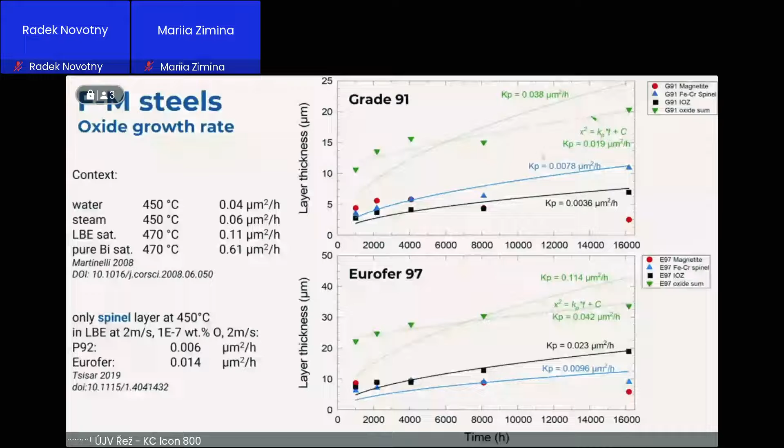So the difference between Eurofer and grade 91, both are 9% chromium steels, they should behave similarly, is the formation of this very thin layer at the spinel–internal oxidation zone interface, which Eurofer is unable to form. The explanation I don't have. So the summary: the spinel is probably responsible for this corrosion resistance. Both steels exhibit high temperature oxidation. You can see that Eurofer has a very large internal oxidation zone.

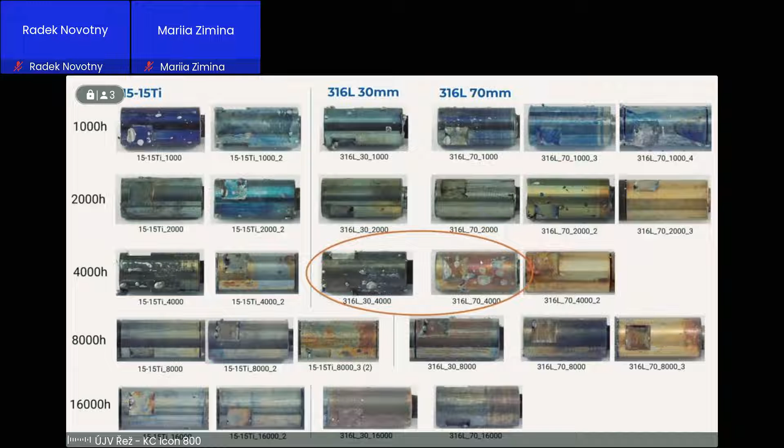Back to the austenitic steels that are more interesting. Why we have this highest corrosion rate of the 4,000-hour specimens was quite a mystery. We're talking about those two specimens. You can see that at the initial short exposure, all austenitic steels have very thin oxide, it's blue, and then it became thicker. And this black color indicates there is a formation of outer oxide similar to the ferritic martensitic steel. And we have the same oxidation rate, and this particular specimen looks intact.

So the fact is that we ran into difficulties to actually measure this corrosion rate, because this specimen was made by a different guy operating the machining, and he made it very rough, and this roughness is around this corrosion loss. So the general corrosion process of austenitic steel is formation of an extremely thin layer, not much more than 100, 200, 300.

That exfoliate and regenerate, and it can be present here even after 16,000 hours, or it may fail and then some lead penetration occurs or localized oxidation. We try to identify what's the composition of this very thin layer that is few, let's say 100 nanometers. It's really hard to do it.

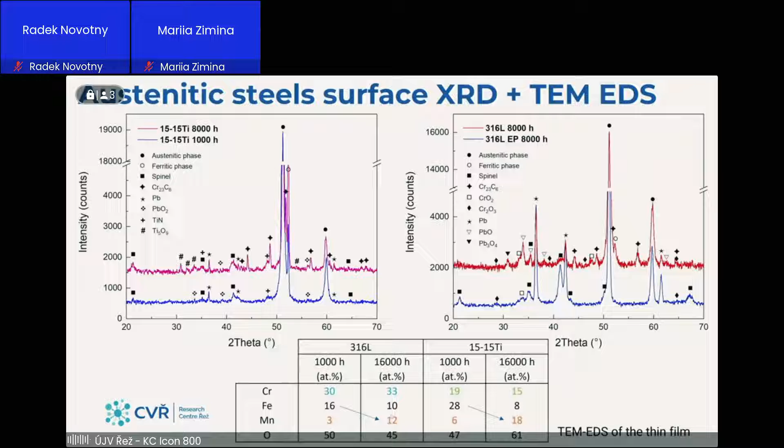So we combine the XRD with TEM to eliminate the amount of phases. And we figure out it's very interesting spinel phase that has some kind of dynamics over the time of exposure. Initial higher content of chromium is reflected in 316 by higher content of chromium in the spinel phase. In 15-15Ti is only 15% of chromium, so there is at the beginning 19% of chromium in the spinel and then decreases, and iron is replaced by manganese.

Quite interesting. This is the structural, the phase we identify there. It can be there even after 16,000 hours. So it prevents from dissolution-based attack, slows down oxidation, and may of course fail as soon as 1,000 hours.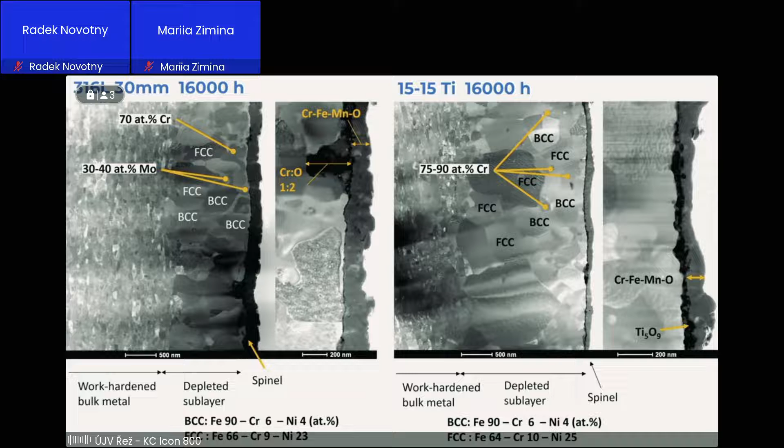The nickel is concentrated in FCC phase, and there is depleted BCC phase accompanied with something that contains a very large amount of chromium. That's similar, something like spinodal decomposition of delta ferrite in duplex steel, but we have austenitic steel. It's quite interesting problem. That may affect some long-term behavior, but 16,000 hours is not enough.

So there are some localized issues that are connected with depletion of this fine grain layer created by machining. When this corrosion or oxidation gets through, we have accelerated oxidation that is connected with outer iron oxide formation that's similar to ferritic martensitic steel.

The weld behavior is very similar, like normal base material. It's protected by very thin oxide layer. There is depletion layer underneath with this nickel-rich FCC and iron-rich BCC phases with some localized deep oxidation. That looks like that. You can see here that there is a nickel concentrated around this. This chromium is here, and these green spots are nickel-rich alloys.

Let's make it open the path probably for a localized nickel dissolution, because nickel is highly soluble in the liquid metal. We try removing this fine grain layer from machining by electropolishing, and what we get here is immediate attack in between the grains by lead. After 8,000 hours, you can see in the nickel phase the dissolution happens. So it's maybe the mechanism how in long term this large-scale dissolution attack develops.

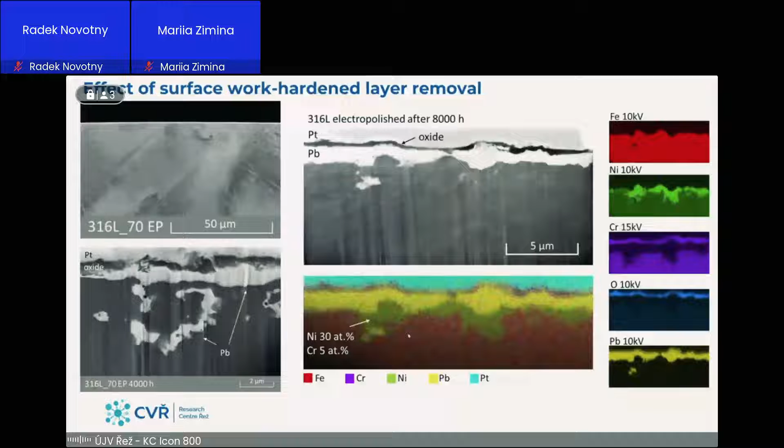But because the solubility of nickel is 1 order of magnitude lower than lead bismuth, we have not that severe problem like I demonstrated on the first slide there. We also did some analysis of coolant during the exposure, and the main point is here that there is no large-scale dissolution attack in the loop.

The nickel is supposed to be most abundant corrosion product because we have stainless steel specimens, stainless steel loop. The majority of wetted surface is containing nickel, and nickel is not there. So, in filter content we have found there is lots of iron, but no nickel.

Iron is not oxidized, it's a big surprise to us, and I think it's maybe affecting, this free iron, the signal of oxygen sensors, and may be the reason that we are having in the loop lower content of oxygen that we are measuring, and therefore there is a concentration of nickel in the surface of our spinel layers.

So to conclude this, we have no large-scale nickel leaching. That's the key message. The second important thing is surface fine-grained work hardened layer created this nice corrosion resistance against the dissolution. Oxide layers are damaged by thermal cycling during specimens replacement because they crack and then develop some localized attack. And 9% chromium steels are suffering from high temperature oxidation at a higher rate than stainless steel.

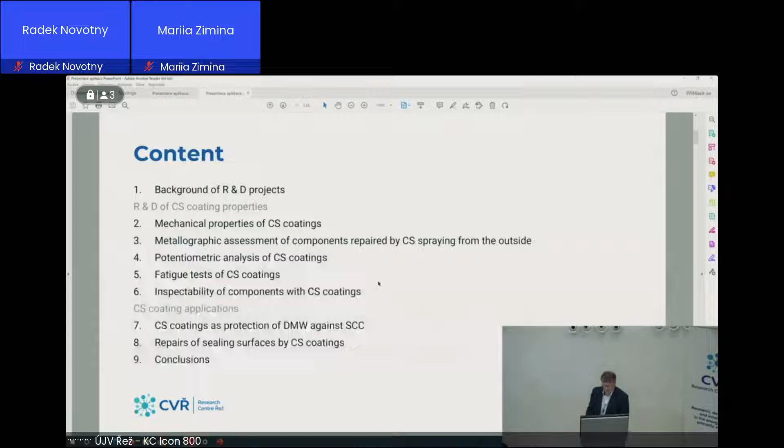Good. Before lunch, I will speak in my presentation about our experience with cold spray technology. In my presentation, I will provide information about research and development projects. Then I will speak about research in the area of cold spray coating properties, about mechanical properties, then about assessment of components repaired by cold spraying from the outside, about potentiometric analysis, about fatigue tests of cold spray coatings, and about inspectability of components with cold spray coatings.

And at the end I will provide some information about possible applications, about usage of cold spray coatings as a protection of dissimilar metal welds against stress corrosion cracking, and about repairs of sealing surfaces by cold spray coatings, and then I will make some conclusions. All activities were done under a project of the Technology Agency of the Czech Republic within the National Center of Competence Program. The first project ran from 2019 till 2020, the second one in 2021, and this year we have the last project.

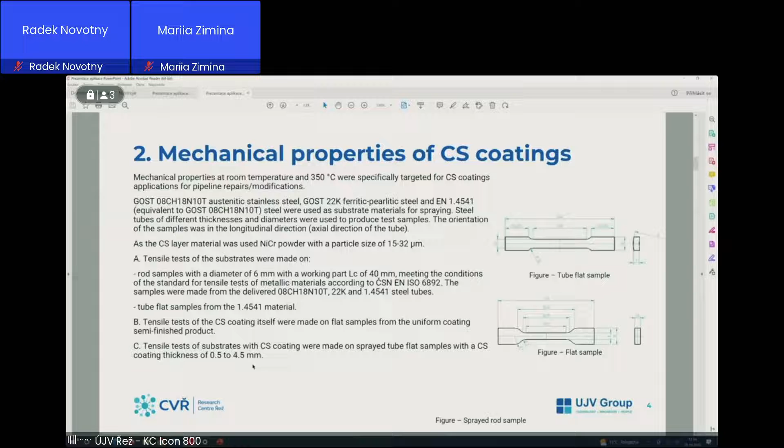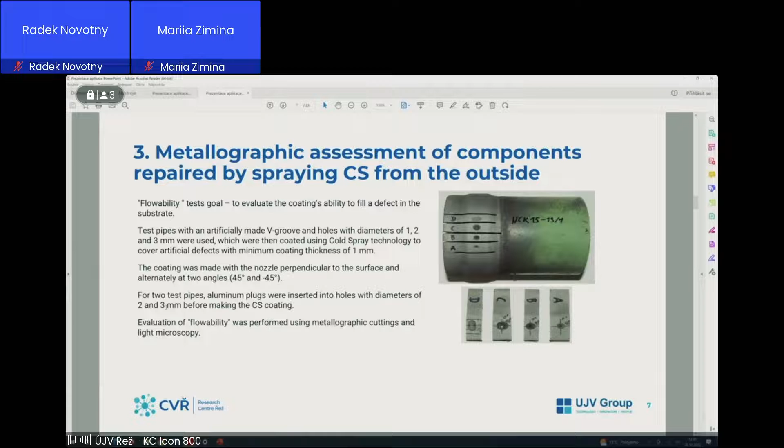For two test pipes, we put aluminum plugs into the holes with diameters of 2 and 3 millimeters before making cold spray coating. And then we performed metallographical cuttings and light microscopy. Results are here.

We can say then if we use nozzle perpendicular to the surface of the pipe, only non-passable V-groove was filled. The other through holes were not filled. You can see that here.

When we performed spraying with gaskets for 2 and 3 millimeter diameter notches, we could see good results, but then it's a question of corrosion resistance of this.

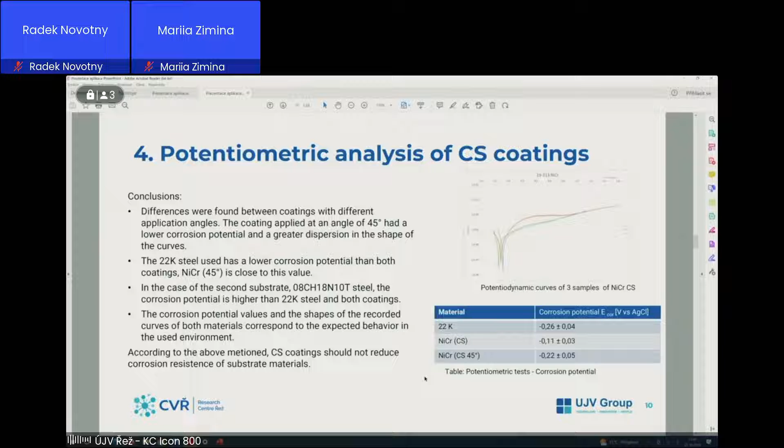This year we performed fatigue tests of cold spray coatings. First we manufactured a plate and sprayed it with nickel chrome and nickel powders.

As a substrate we used steel 1.4541 with thickness of 16 millimeters, and then we cut this plate and we received 15 pieces of each, so in total we had 30 pieces of samples. And then we performed cyclic fatigue and thermal fatigue. What concerns cyclic fatigue, we had 2 types of loads.

After applying fatigue, we performed UT, non-destructive testing, and microanalysis. What concerns thermal fatigue, the first type was

drastic. We heated samples up to 320 degrees centigrade, followed by cooling with water to room temperature. We tried to perform 30 cycles.

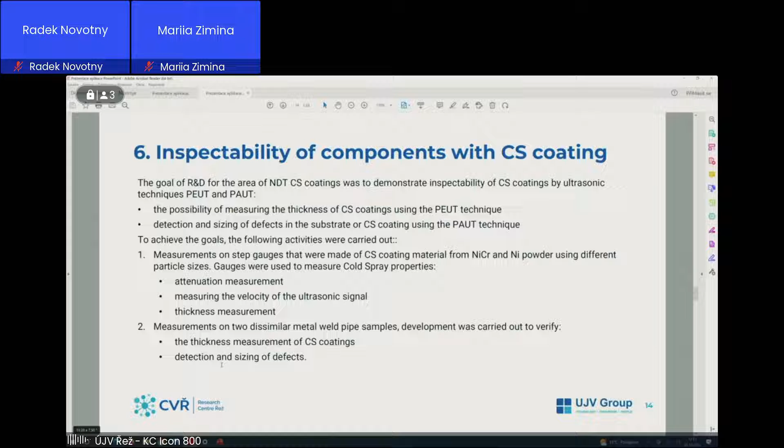Now let me speak about inspectability of components with cold spray coating. We used pulse echo technique and phased array technique. Pulse echo was for measuring the thickness and ultrasonic features of cold spray material. Phased array technique was used for detection of defects and for sizing of defects.

We manufactured these step gauges. Here is measurement of one step in this step gauge. And as I mentioned, these materials are good for inspections.

Here is an example of detectability and sizing of EDM notches. And again, it works like with samples of steel material. So, conclusions - there is not so much time.

The main conclusion is that cold spray coatings can be inspected using pulse echo ultrasonic testing and phased array techniques, unlike other hot sprays.

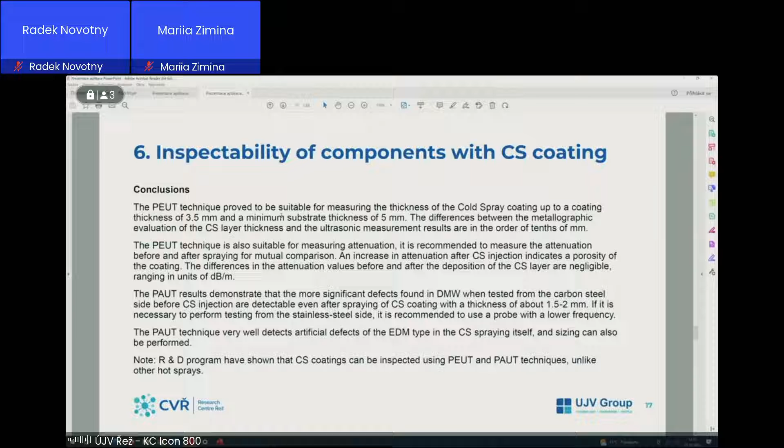Now, two examples where we think cold spray could be used. Cold spray coatings could be used as a protection of dissimilar metal welds against stress corrosion cracking. We cooperated with Impact company from Germany.

Cold spray was deposited at the angle which can be achieved if we take into consideration the length of the tube. And in this first injection procedure, the results were not good in terms of high porosity.

samples survived tests in salt fog, and we didn't see any attack on the substrate through the layer of cold spray coating. What concerns porosity, nickel chrome is better than nickel powder, and the results again were very good after tests in salt fog.

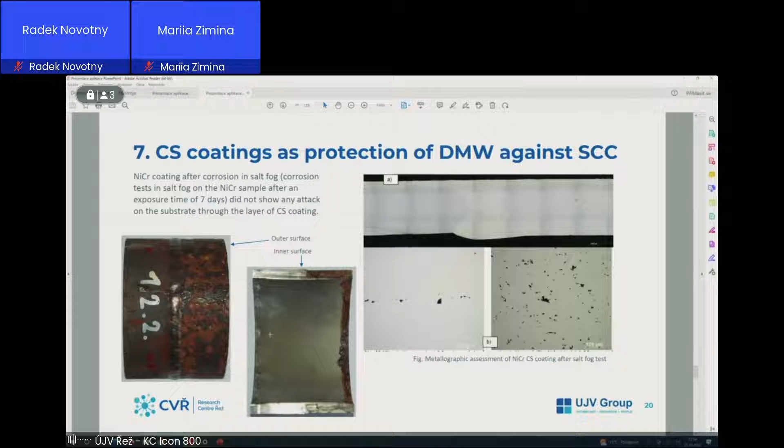Now we send this flange to Impact Innovation. In Impact they will apply cold spray to the whole part of the sealing surface. Then the surface will be processed to create a new sealing surface.

More tests will be done in UAM Institute in Brno. They performed flange leakage tests without any simulated defect, and after application of cold spray they will perform leakage tests of the repaired flange, and we will see the results from the point of view of leakage. And we in CVR will evaluate microstructure of cold spray coating and substrate interfaces in laboratories in Pilsen.